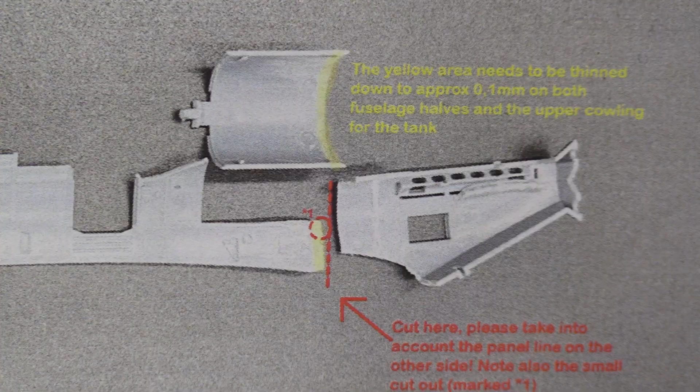But to make it mount, you have to do a few things. I'm sorry if it's quite small - a bit more zoom. So what you basically do is the yellow area needs to be thinned down a bit, and you need to completely remove that front section that I showed you on the model. I think the trick here is to take your time - measure twice, cut once, I should say. You need to be very careful and take your time, make sure you're not overcutting anything. That gets removed, and then it goes in.

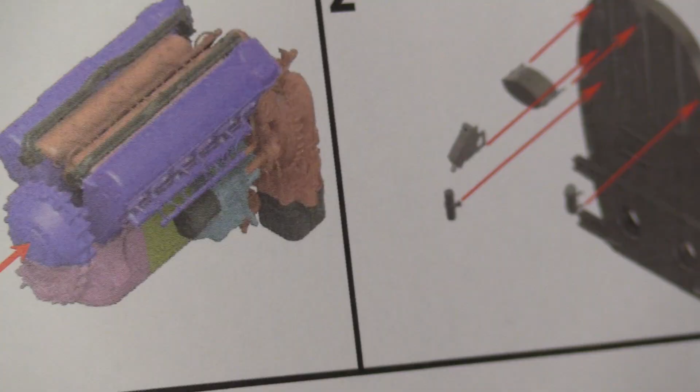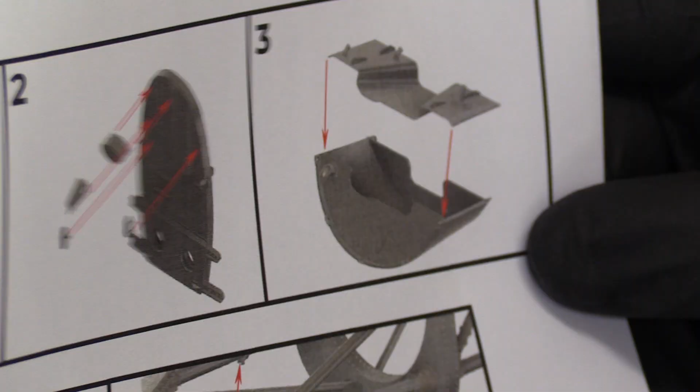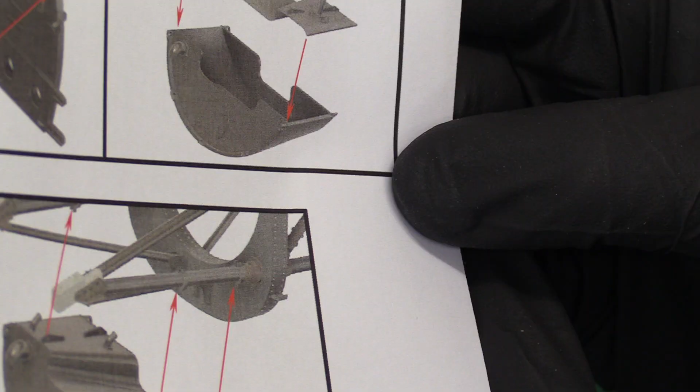Now, in terms of the actual instructions, here they are - these have only just come through to me. So you've got basically your propeller shaft, and then you've got this bulkhead with the little oil container reservoir on it, and then your oil tank underneath. All these parts you see are included in the kit.

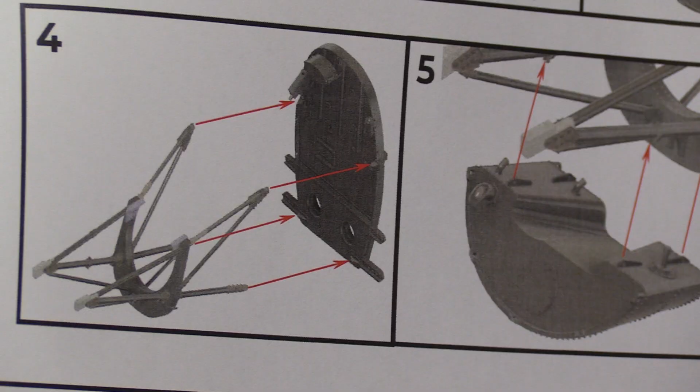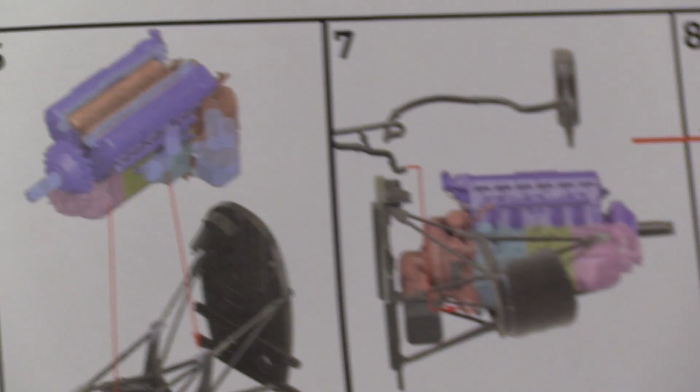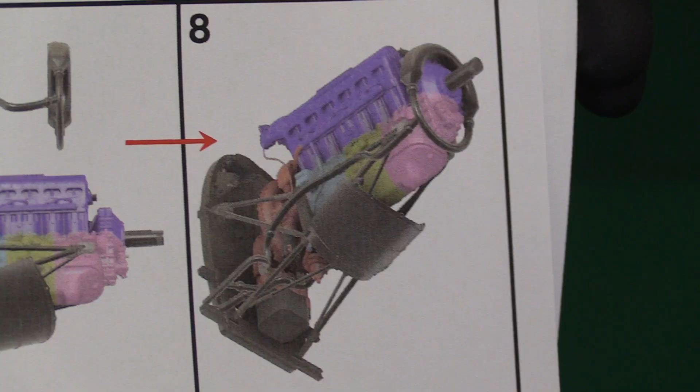Then you've got your main cradle, your engine bearers, which attaches to that big bulkhead. Underneath, you attach this completed oil tank, and then you bring in your Merlin and drop it in like so. Then you've got all your plumbing for your cooling system, with all the piping for the cooling area.

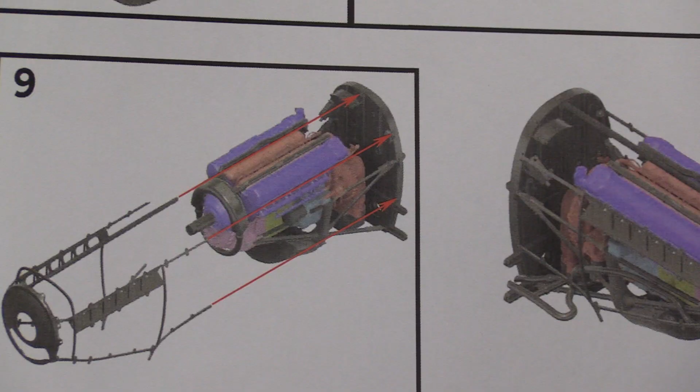And then finally your outer frame, which is ultimately for the cowlings to mount onto, and the exhaust goes over the exhausts. And then voila, you have got your engine. Now it doesn't include any exhausts, because you can use the ones in the kit. But there you go, that is the completed assembly of your Merlin engine.

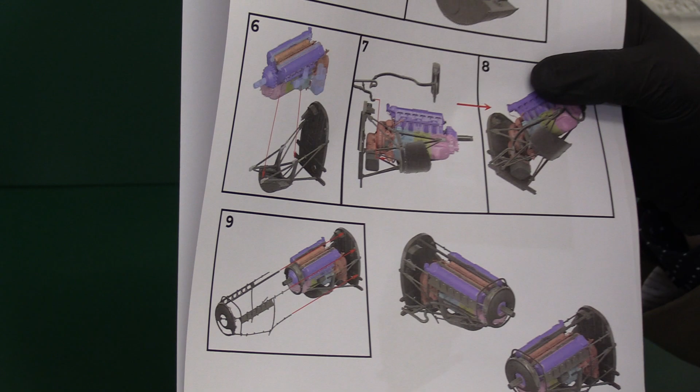Now I'll show you how fine some of these parts are, because certainly some of it is quite remarkable. Ooh, it's one of those things where you're going to have to proceed very cautiously, I think, because these parts are very, very delicate, frankly.

So that's our new instructions that have come through. Let me show you the bits you haven't seen. We've already seen those two.

Then we've got the engine bearers. Again, it's 3D printed, so there's a lot of lattice work in terms of the way the 3D print has been done to support it. Whoops, it's difficult to hold. Here we go, here's our engine bearers, complete with the supporting brace.

So your Merlin is now the right way up. The Merlin goes in, drop it in from above.

Once you've got to cut all these, cutting all this off very carefully, you've got to take your time because there's a lot of - it's not like a normal kit where there's just one or two sprue attachments. You've got all these attachments, got to make sure they're all clean as well. You must really take your time with these things, it's essential. That's from the back looking forward. Nice, isn't it?

Then we have the cooling jacket for the cooling system that goes around the front, the collar. Around the front, and you can see all the associated plumbing, which they've done beautifully. Look at that. I do apologise if the focus isn't brilliant, but as we know, it doesn't like resin in this camera, and it's got very low contrast in the lights here. But there's all your plumbing and cooling that goes around the collar on the front of the engine and down the side.

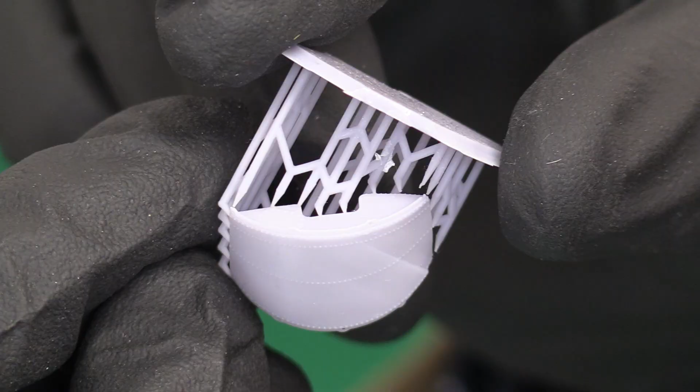Isn't that cool? As I'm looking at it here, the image on the camera looks really whited out. It might be a bit bleached out, but you'll have to just take my word for it.

It is rather nice. And then finally, we've got the framework for mounting all the outer cowlings and panels. So looking at the front, looking backwards, you can see where the exhaust apertures are there. Impressive, isn't it? Amazing.

Now somebody did talk about this the other day, and it's worthy of note that because you've got all this cleanup to do, somebody was talking about a new tool on the market - I can't remember what it's called, but it was basically a cutter, a very high frequency cutter that enables you to cut 3D resin. I think the only problem is that you've got a lot of cleanup on something like that - there's so many contact points, it's going to be really tricky. But the actual design is very good, it looks very clean and accurate.

And then here we've got a little bag with some of the extras, including this - this is the top. Whoops, careful. This is the top of that oil tank underneath. You can probably tell by the profile in my fingers, hopefully.

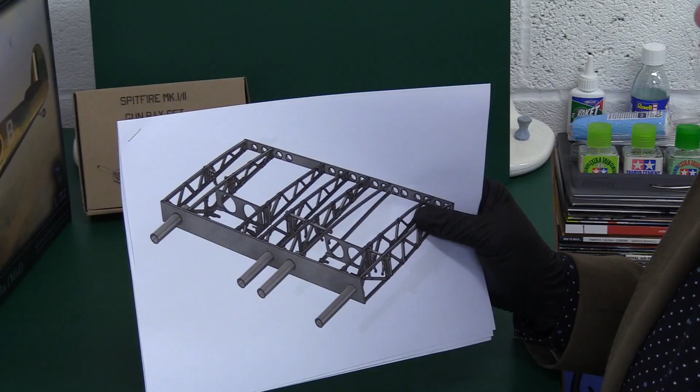So, it starts off with this one. There's quite a few of them actually - I think I've got maybe a duplicate set. It's definitely a duplicate set. And what we've got is basically the internal spars in the gun bay area, and it comes as you see it - that's one piece. Would you believe? And this is the beauty, isn't it, of 3D printing with such intricate detail - all of that is a single piece, incredibly.

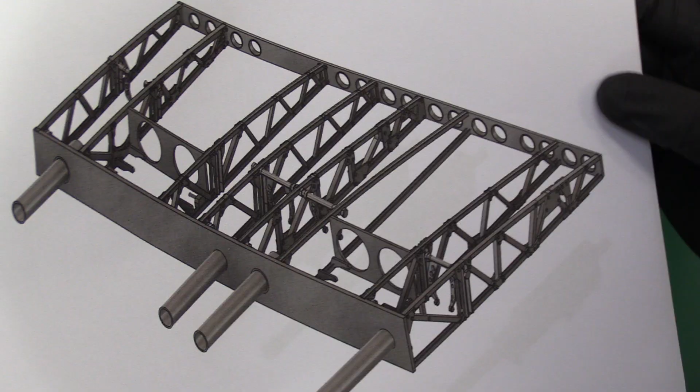And then you've got your .303 Browning machine guns, which are beautifully done, it has to be said, as you'll see in a minute. And this - this is actually one piece which is actually missing in mine, but Chris has already arranged to send me another one. It's on the way as we speak.

And this is the machine gun belts - not sure where it went, it certainly wasn't here when it arrived. So whether he missed it or whether it's disappeared in packing, I'm not sure. But that's on the way, and this is very, very fine. I know he's had a bit of trouble with that because it's so small.

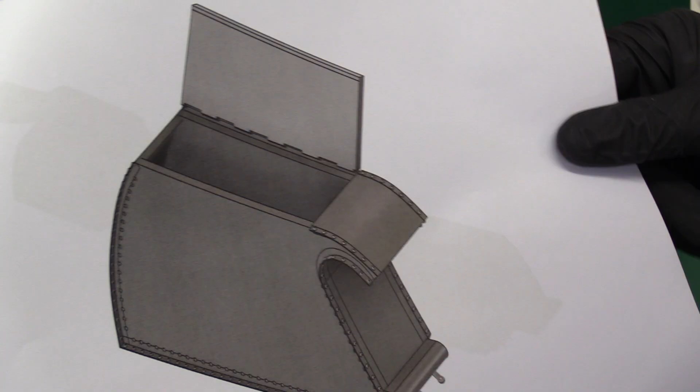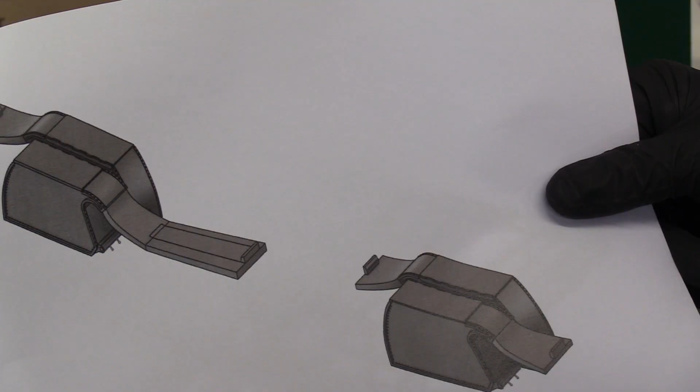It's tricky. These are the actual ammo boxes that feed - so imagine all your belts of ammunition are actually all fed into this box, and then they come out here, feeding into the gun. And there it is, in fact you can see it there, can't you? So you can see the way they feed in opposite directions, just for reasons of space saving. So this is inboard, this is outboard on the wing. So that's what it looks like there.

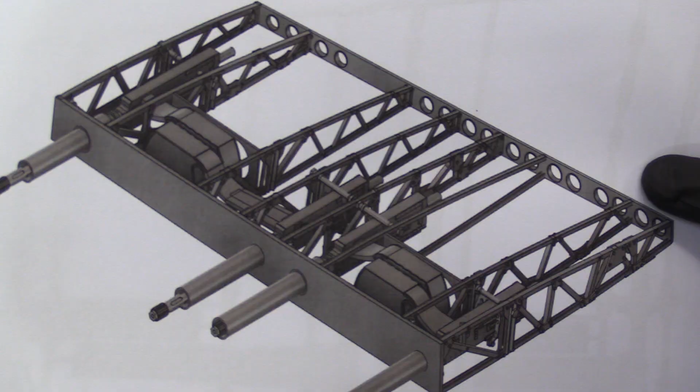Now when it's actually assembled, the next one I'm going to show you is a different image, three different images. This is what it looks like when it's finished, and you've got your .303s then in situ - just come back slightly - .303s in situ, you've got your gun, your ammo feed boxes and your belts all there.

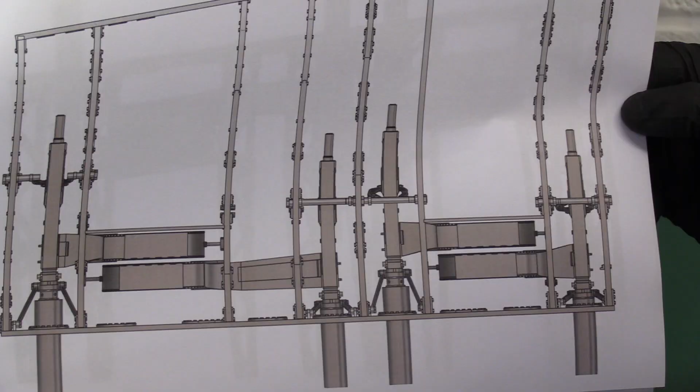And then he's got a couple of plan views. Here's the plan view, what it should look like. This is on the starboard wing, and you see your feed boxes, I should say. And then a more detailed 3/4 view, so it gives you an idea about the angle and positioning of everything.

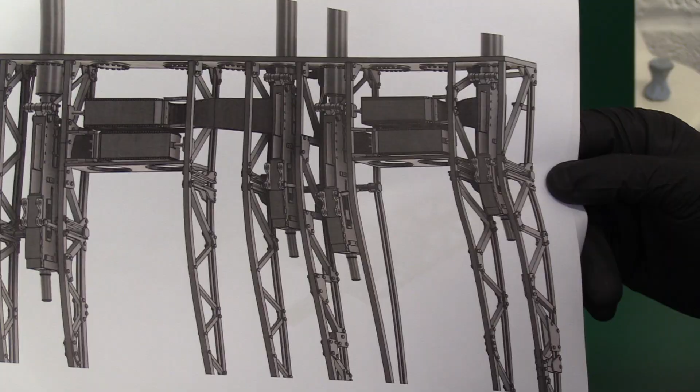I appreciate the light's not very good on this. I think maybe looking at some reference photos would be helpful as well, just to give yourself a little bit of a help. It's not the most detailed information from him in terms of instruction. He hasn't actually done that yet, he was telling me on this one. But he's a bright guy, and he's definitely on the ball with the rest of it. I'm sure it'll come.

Then we've got a little box opening. This is probably going to surprise you the way it's presented, because it's almost completed in situ. There's a little bag of parts here, which we'll come to in a second, and then a second one that repeats, basically the ammo boxes. And then he's actually presented in the box the complete assemblies, which is absolutely amazing. So let's have a closer look at this.

So there's the starboard side. You've got the tubes through which your gun barrels actually fit. Turn it around a bit, give you a little perspective. Look at that. Obviously it's on a plate of where it's been printed on the 3D mounting plate, so you cut it off there clearly. You can see where you're going to cut it all off.

Then you've got your machine guns, let me get a little bit closer for this. There we go. You've got everything apart from the inner three on both sides there. See that? And if you look at the barrel detail, he's done a really nice job with the printing. It's absolutely spot on. It's just quite hard to see in the light, and again, resin doesn't lend itself unpainted to being photographed very well.

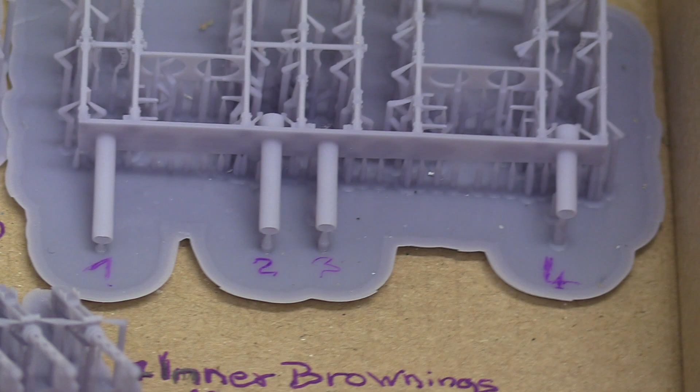When you see it here, it's pretty obvious exactly where everything goes. All you've got to do is follow that. That's really remarkable, isn't it? It's really well done. So obviously the proof of the pudding about how it all fits together, that's going to be tricky. You've got to feed these guns through these apertures here, guide tubes. And again, this is on the port wing. Isn't it amazing that that's all just one piece? It seems quite remarkable to me.

Yeah, that's really, really nice. But I think it's going to require patience, and maybe some reference photos would be particularly helpful for this, I think.

So that's that, and then you've got here - these are the ejection chutes. Yeah, these are just the ejection chutes that go on attached to the bottom of the wing, for where the spent shells fly out, basically. And then there's another bag of them here.

Let me open this bag up actually, let you have a closer look. Yeah, there they are. Isn't that amazing?